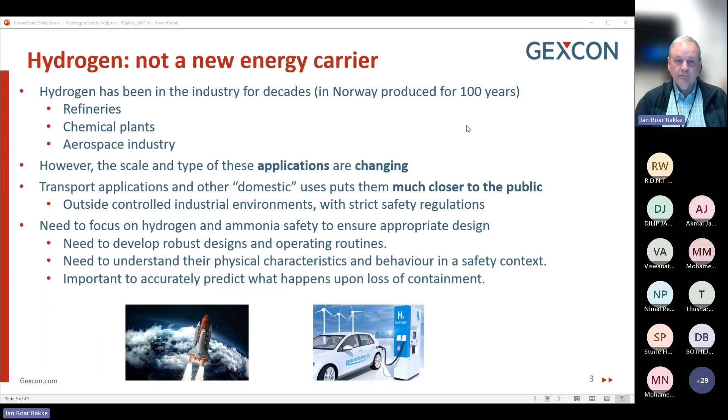Well, is it safe? The reason why we are focusing on hydrogen is, of course, its great potential as a clean and versatile energy source. And producing it, in particular from renewable sources, makes it a very valuable alternative to fossil fuels. But unlocking its potential requires addressing safety concerns associated with not only production and use, but also storage and transportation.

Studying historical incidents will help us identify root causes, develop safer technologies, and implement effective safety measures. And experts can then establish best practices and guidelines to prevent accidents in the future. For example, you can find information about hydrogen incidents on the website h2tools.org under Lessons Learned.

What is very important is to realize that accidents will happen. Risk will never be zero. We are striving to make it as low as we can, but it will never be zero. So when an accident happens, or even just a near accident, investigate and learn from them. That is how we can avoid it happening again in the future.

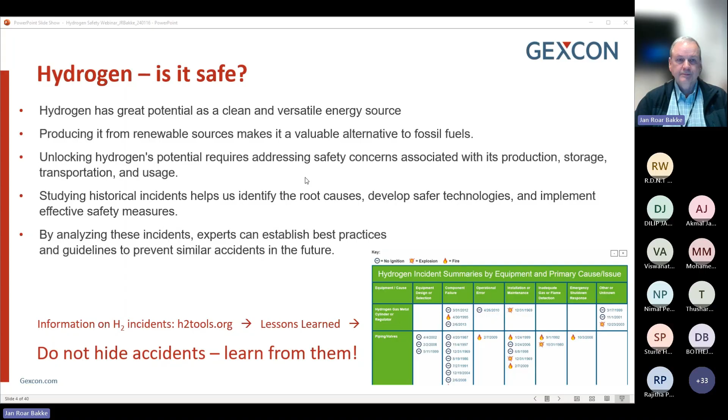As was mentioned, there are 4 parts to this presentation. The first one is examples of hydrogen accidents. The second will be hydrogen safety characteristics, fires and explosions. The third will be analysis and control of risk, and the last one will be on safety regulations. So I will start with the hydrogen accidents.

I don't plan to go into a lot of detail. Time does not permit, and I probably don't have the necessary insight to really go into the depths of all these accidents. But you can find relevant information online, quite detailed, about the different accidents.

The first one that I will address is the explosion that happened at the factory of Laporte Industries in London. It's a long time ago now, back in 1975. There was an alkaline electrolyzer in the plant, which of course produced hydrogen by, in this case, electrolysis of a potassium hydroxide solution. Potassium is what we in Norway would call kalium, but it's the same thing. The process also, of course, produces oxygen, which was then discharged as a waste product.

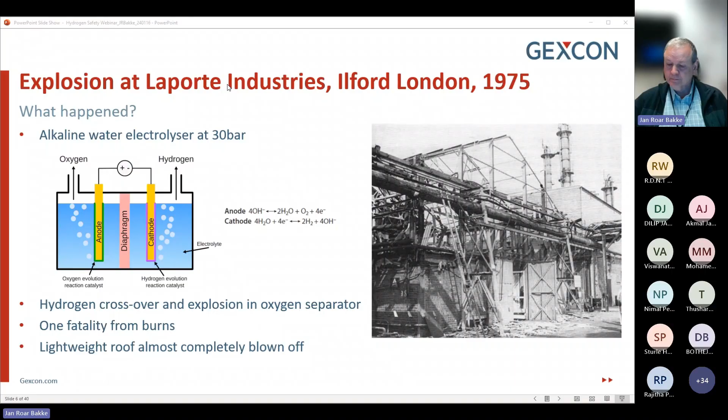So what caused it? Well, first, electrolyte passages were blocked by sludge. These were responsible for admitting electrolyte at the bottom of the cells. This blockage caused a reduction in electrolyte flow. The velocity of the electrolyte increased where the passages were partially blocked, which then caused eventually corrosion and erosion of both the electrode gauzes due to hydrogen embrittlement, and the separator suffered from physical breakdown, resulting in the mixing of hydrogen and oxygen, which ignited and caused this strong explosion.

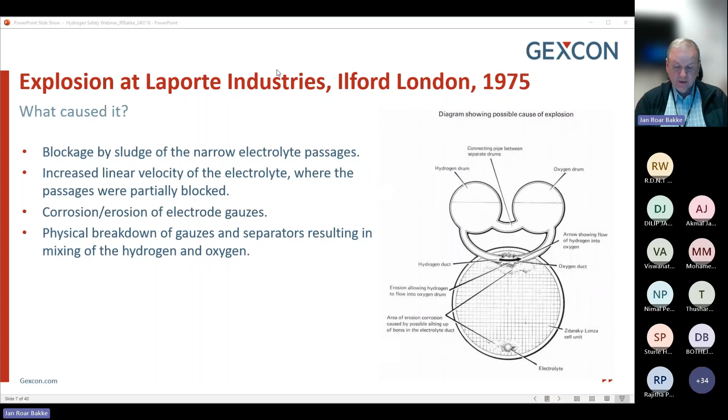The explosion could have been prevented, or wouldn't have occurred, if the manual gas analysis for purity of the oxygen produced had been carried out diligently, if there had been a system for checking the accuracy of the gas analysis recordings, if the dangers from failure to carry out oxygen analysis had been emphasized to the operators, if the plant had been kept shut down until the cause of previous issues had been determined, and if the cause and effects of sludge formation had been more thoroughly investigated.

So this all points to the importance of process safety and hazard awareness, and the importance of operational checks, inspections, and maintenance.

There is an IChemE report that you can find online, which really goes into detail about this accident and the findings.

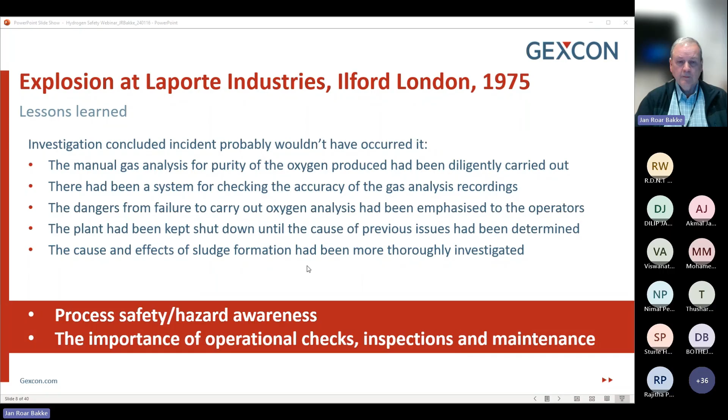Another one: there was an explosion at an ammonia plant in Norway due to a hydrogen leak inside a building. This was back in 1985, still a long time ago. Hydrogen was produced at the ammonia plant by partial oxidation of a heavy hydrocarbon fuel.

The total amount of hydrogen released was estimated to be between 10 and 20 kilograms, which meant then, because 1 kilogram of hydrogen at normal conditions would be about 12 cubic meters, so 100 to 200 cubic meters of hydrogen was released.

The energy content of 1 kilogram of hydrogen is equal to about 30 kilograms of TNT, but not all of this energy released when hydrogen explodes is released in the form of a blast wave. So it was estimated that the explosion was equivalent to between 100 and 200 kilograms of TNT.

So a strong explosion. Two employees died. There were broken windows, structural deformation, and damaged walls, and severe window shattering within a 400 meter radius.

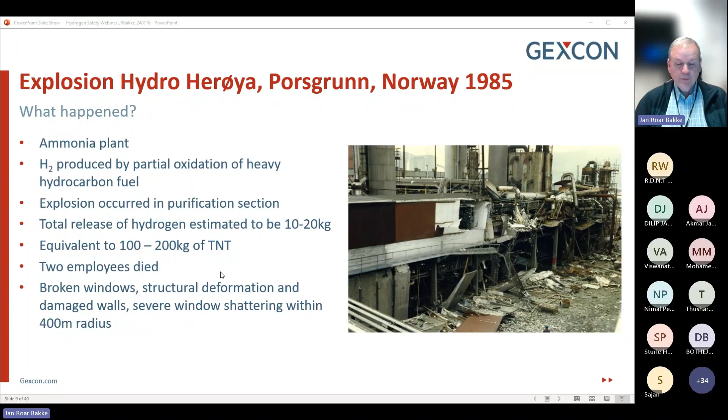So what caused this accident? The main explosion took place in the purification section of the hydrogen plant. This section contained a wash tower where CO2 was being removed from hydrogen by absorption in water.

The accident was triggered by a gasket in a water pump blowing out, which occurred when operators were trying to change from one pump to another. Here I call it from pump B to pump A.

Unfortunately, they did not observe that the valve in pump A was closed. So the water supply from pump A was too low to maintain the water level in the absorption tower, resulting in automatic shutdown.

A second attempt to start pump A resulted in a higher vibration level than normal. The operators discovered that the valve was closed. They tried to open it, but failed due to the large pressure difference that was observed. A backflow of water traveled to the gasket, bringing the hydrogen with it.

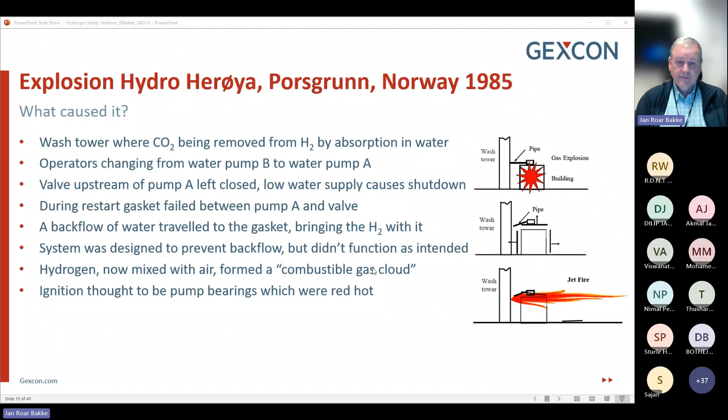So what did we learn? Well, the investigation concluded that the accident occurred as a combination of operational error, technical failures, and weakness in the design to mitigate failure mechanisms. So a key issue here was that the design was actually vulnerable to human error.

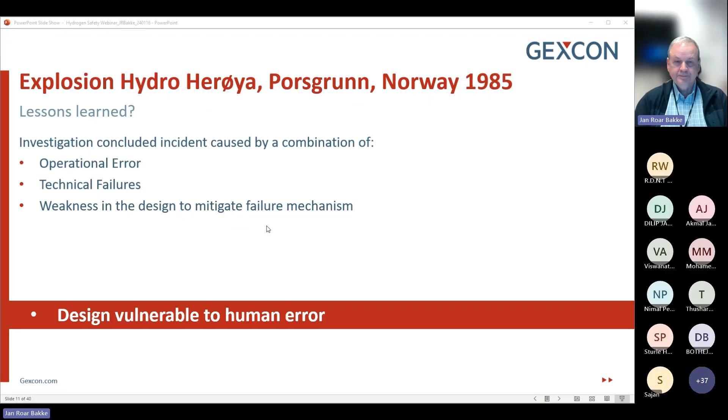The third accident and final one I'm going to talk about here is a hydrogen tank explosion in South Korea 5 years ago. So what happened there? Well, an outdoor tank containing hydrogen gas exploded at the research and development complex during the test of a water electrolyzer, which was coupled to a renewable energy system.

2 men died, 6 were injured, and several buildings were severely damaged up to 100 meters away from the explosion. The equivalent TNT mass in this case was estimated to be about 50 kilograms based on observations of the damage nearby.

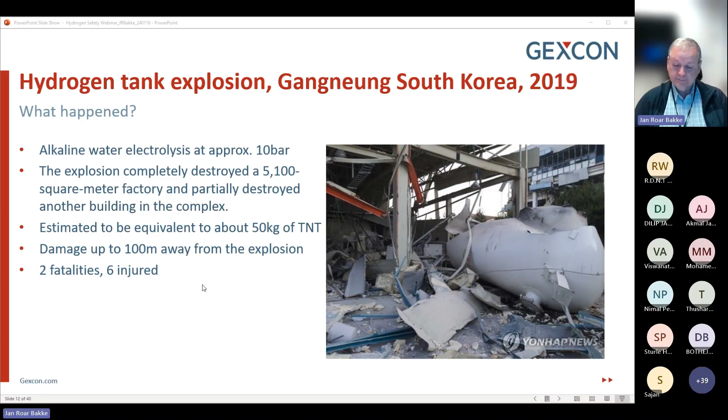So what caused this? A pressurized alkaline water electrolyzer was under test to evaluate intermittent renewable energy duty cycle performance. The electrolyzer's cell membrane suffered from degradation, which permitted excessive oxygen to permeate into the hydrogen storage tank. So the hydrogen then mixed with the oxygen and formed an ignitable mixture.

The mixture ignited within the tank, resulting in an internal explosion. The source of the ignition was unclear, but there is some belief that it could have occurred due to auto-ignition, so by itself, or an external spark. So we don't really know.

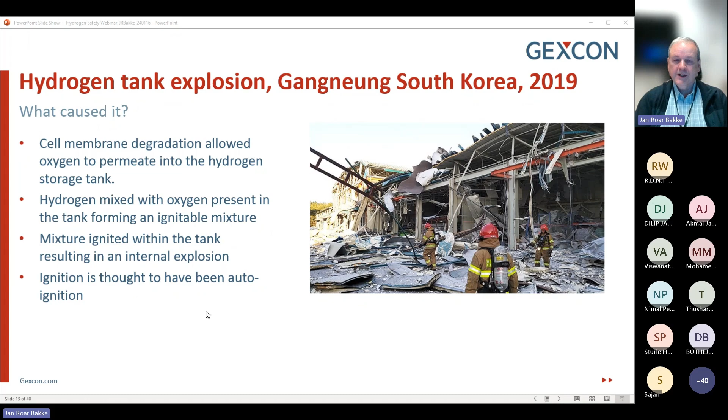The damage that you see on the photo here is quite typical of explosion damage. It is mechanical rupture and deformation of structures. It is different in that sense from fire damage, which could be more like melting, at least when it is steel or metals that are exposed to the heat in the fire.

The investigation concluded that better understanding was required of the connection between membrane gas permeability, degradation, and the dynamic operating range of the project when establishing process safety control. Consideration should be given to automatic actions, such as storage isolation, stopping gas generation when safety limits are exceeded, such as flammable gas mixture, excessive cross-cell differential pressure, and other applicable process safety limits. So the key issue here is to understand potential failure mechanism, know the safe operating limits, and take actions when exceeded.

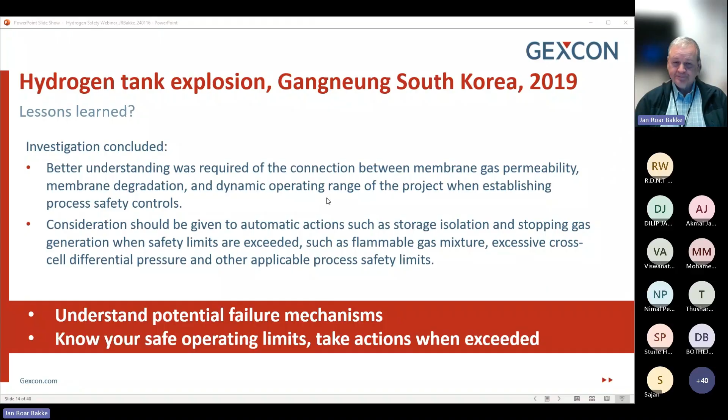All right, that was the first part. Now I go on to hydrogen safety characteristics, fires and explosions. That means to learn more about the physics and chemistry of when things go wrong with hydrogen.

Hydrogen is different from substances like hydrocarbons, for example, and needs to be handled differently. It is extremely buoyant. It is odorless and non-toxic, which means that it's not easy to detect by people. It is a gas at ambient conditions. It can be a liquid if you cool it down below the boiling point, which would be around 20 Kelvin or minus 250 or so degrees Celsius. It has a very wide flammability range, which means that you can ignite it almost at all concentrations.

If you compare with methane, methane is flammable between 5 and 15% by volume, whereas hydrogen is between 4 and 75. Now, you will not get an explosion if you have a hydrogen air gas cloud at 4% by volume or at a concentration of 75% because it will be burning so slowly. But it may ignite and the flame may propagate to other parts of the cloud where perhaps the concentration is nearer to the stoichiometric concentration, which is around 30%, and then give rise to an explosion. But you need a strong ignition source to ignite hydrogen at the flammability limits.

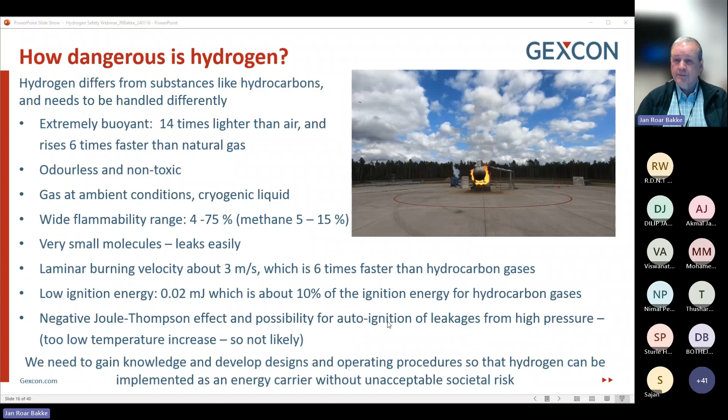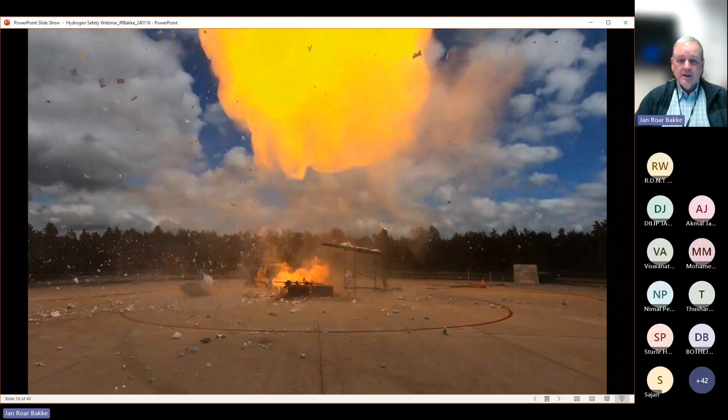But we need to know about the characteristics or the peculiarities of hydrogen to be able to develop designs and operating procedures so that we can implement it as an energy carrier without unacceptable societal risk. Here is just a video which shows a BLEVE, boiling liquid expanding vapor explosion. This was liquid hydrogen in a container which was then heated by a fire from outside.

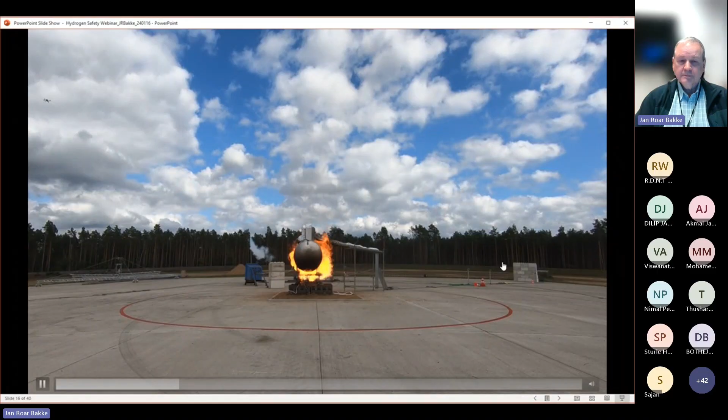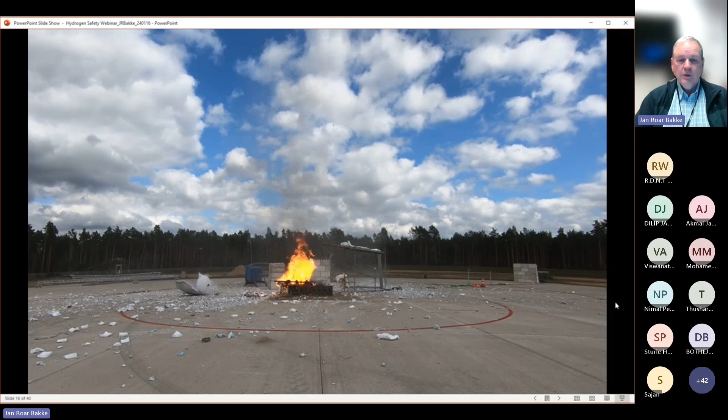So these BLEVEs is something that can happen with other fuels, and it also can happen with hydrogen.

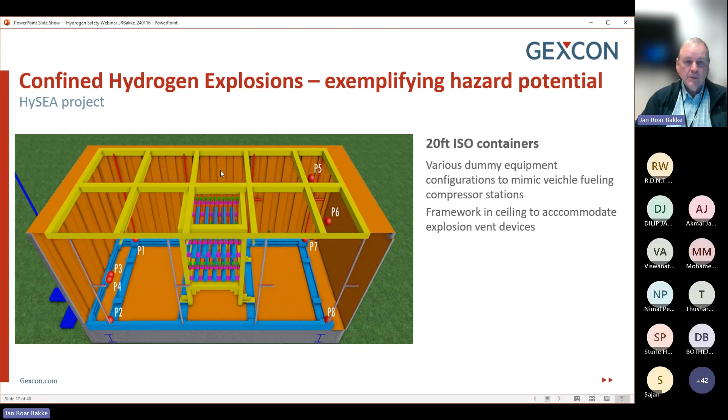I would like to make note of the ceiling in these containers, where we removed the ceiling and put in some framework to be able to accommodate explosion vent devices, meaning weak plates which would open up very early in an explosion due to the low pressure experienced at the beginning, so that the overpressure would be vented out of the enclosure and thus relieving and reducing the maximum overpressure that could be experienced.

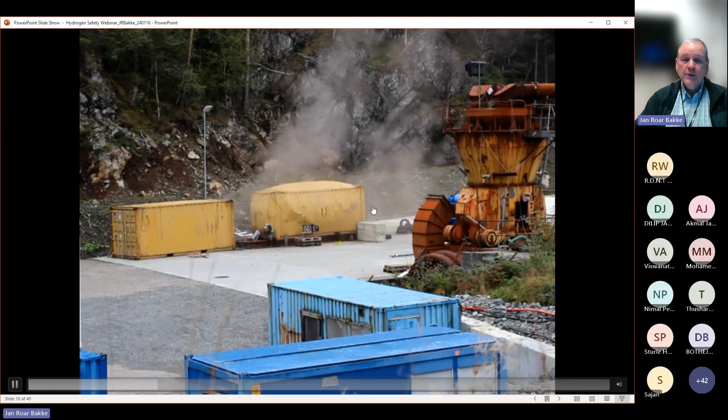Here's a video showing such a test. 24% by volume, so lean, but relatively close to stoichiometric concentration. And you saw a door from the end of this container flying through the air, and you can also see the shape of the container is now different.

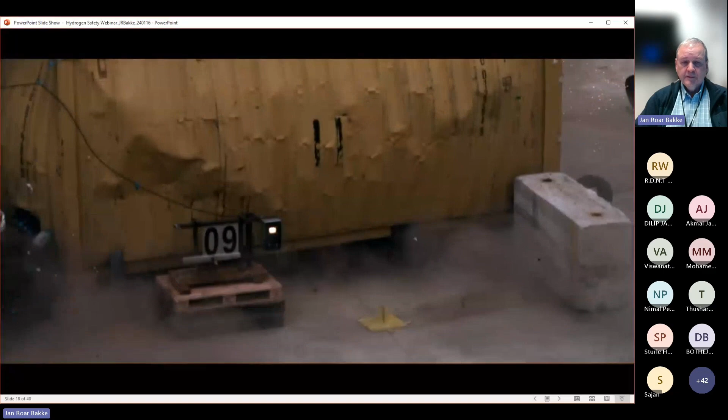Here is a high-speed video of the same. So this explosion was approximately 1 bar or 1.1 bar overpressure, compared to atmospheric pressure. From another angle.

So this is an illustration of what can happen if you confine hydrogen. Remember, I mentioned that hydrogen is light, so it would tend to move upwards. But if you actually contain it in a container like this, then it will not be able to disappear or spread out and go away from where the explosion happens.

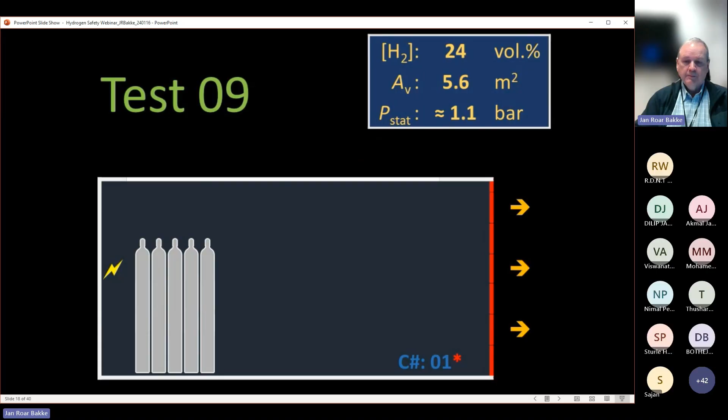So one of the learnings, one of the things that one should think about when it comes to hydrogen safety, is that you should not collect it inside something. Try to have open structures so that it can disperse because of its buoyancy. It will do that.

Here I have two videos also showing an identical setup, now with these explosion vent panels on the top, on the ceiling, as you can see from the pictures here. The left video is 12% by volume, and the right video is 15% by volume, so slightly higher concentration on the right-hand side, but still lean, far away from stoichiometric.

You will see that the left one with the lower concentration is slower and weaker, and the right one is faster and stronger. You can judge that based on the speed of the opening of the panels. So this is slow, and this is faster. It's quite clear.

So a relatively small difference in concentration will give rise to a stronger explosion.

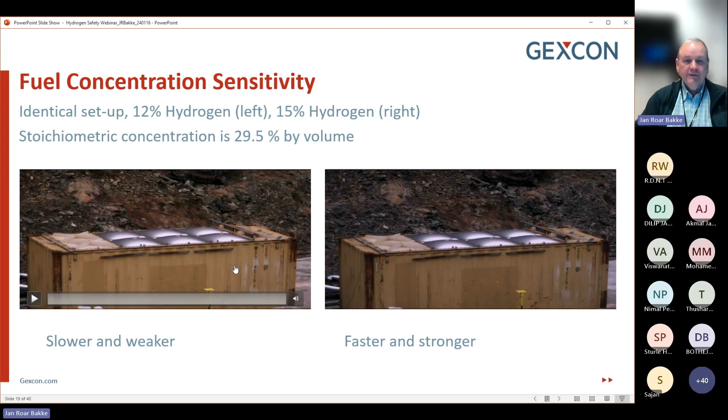We don't know everything that we should know or need to know. But the research is ongoing at many places, in Gexcon and other places as well. There is a lot of research going on to try to understand hydrogen better so that we can use it safely.

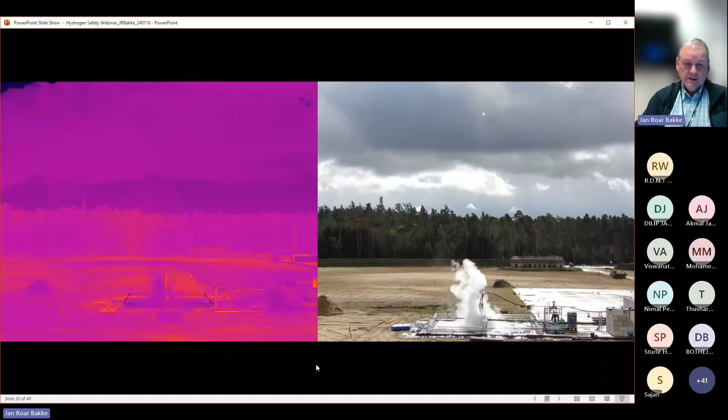So the question that immediately came up was, why did it ignite? Because we didn't have an ignition source. There was nothing there that could explain that it ignited.

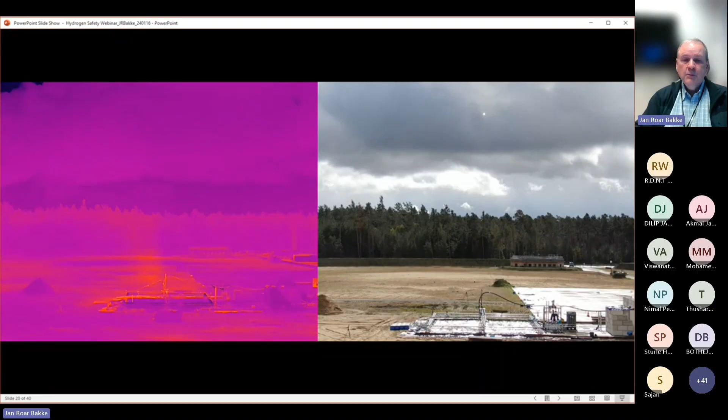But this test was repeated more than 30 times, and in more than 70% of these tests, ignition happened without any known ignition source. And it is clear, if you want to do safety assessments and use hydrogen in a safe way, these are things that we need to understand. Why does it ignite?

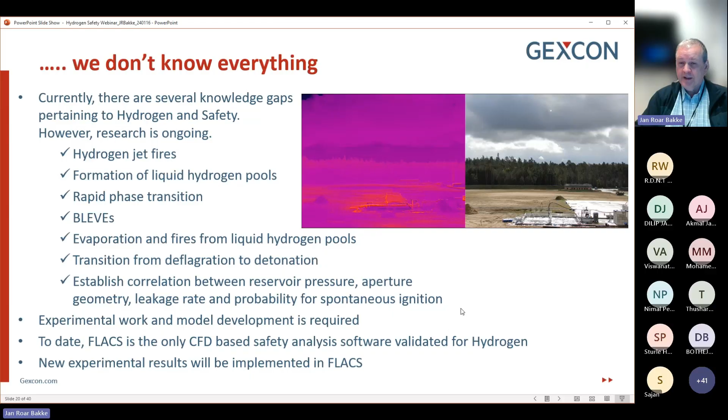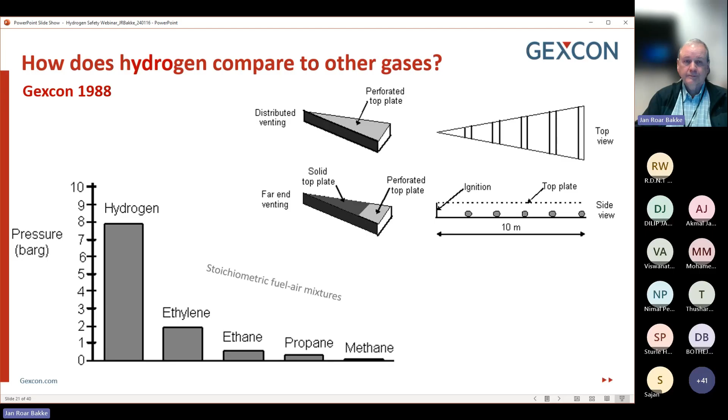I have a few videos, not from hydrogen explosions, but they illustrate which parameters influence explosion strength. These will be the same parameters, whether you have methane or propane or hydrogen for that matter. The main difference with hydrogen and the others is that it is more reactive, it ignites more easily, and it burns faster.

So I will now show a video of 3 explosions, and there is a permeable panel on the end of this module, which will blow off if the explosion is strong enough. The 3 explosions: 0.3 bar overpressure is the first one, the second is half a bar, and the third one is 1 bar. From lean methane air to stoichiometric methane air to stoichiometric propane air. Propane is worse than methane in terms of overpressure.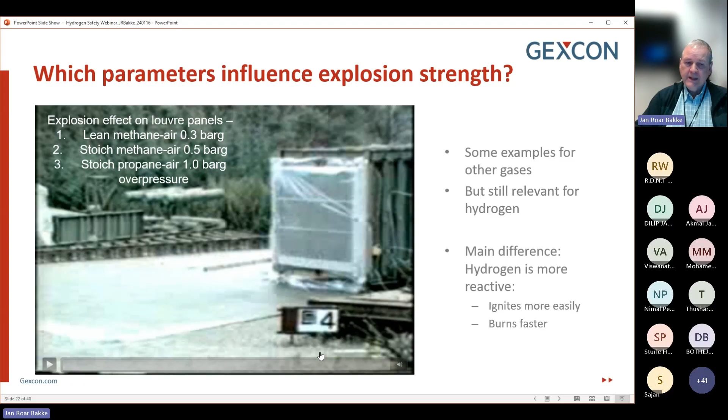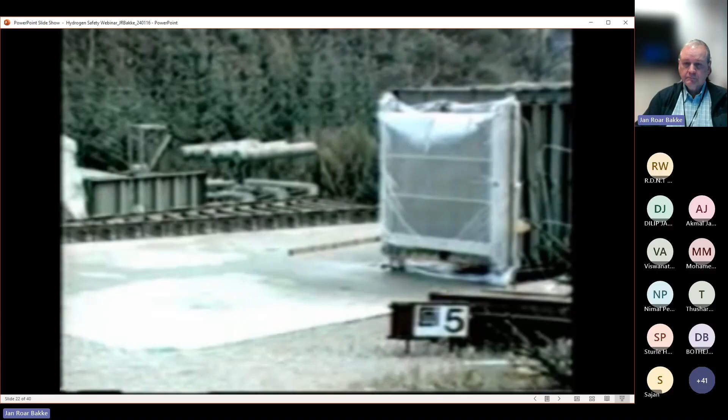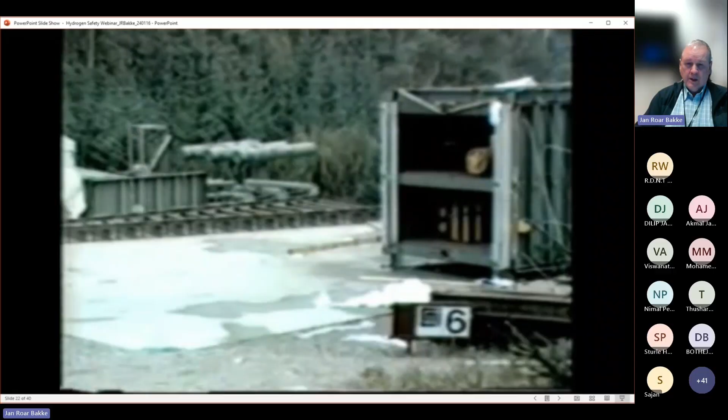0.3 bar, nothing much happened. You can design for 0.3 bar. Half a bar, stronger, as you can see, and the panel fell off. And 1 bar — now 1 bar is a relatively strong explosion, and it can be quite expensive to design for a 1 bar explosion overpressure. Here you see the panel ended up in the forest around 40 meters away from the test facility.

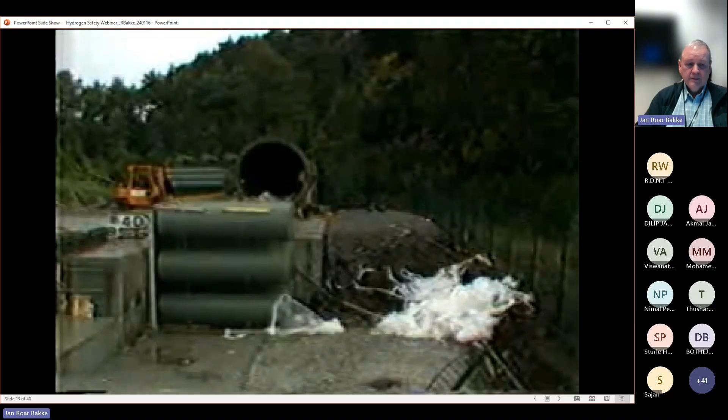When you consider designing a facility involving flammable gases, and also hydrogen, remember this: that the congestion you put in there in terms of pipework and so on will influence how strong an explosion can become.

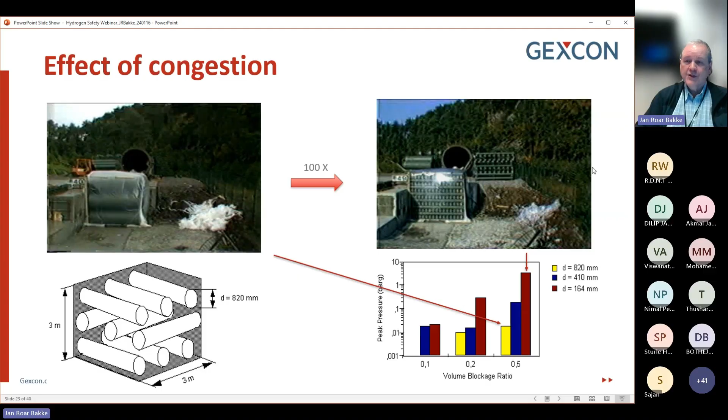Another couple of tests, these were done by DNV-GL. We had a 45-meter long rig containing pipework, and there is plastic around the rig to contain the gas, because we fill the rig with gas and then we ignite it. The first one is obstacles along the whole rig, and you can see the flame starting to burn on the left-hand side, and then it accelerates and goes faster and faster. It is so that the faster the flame is, the higher the overpressure is.

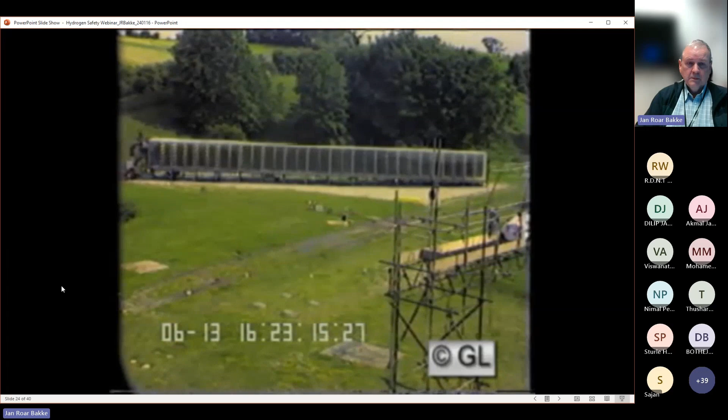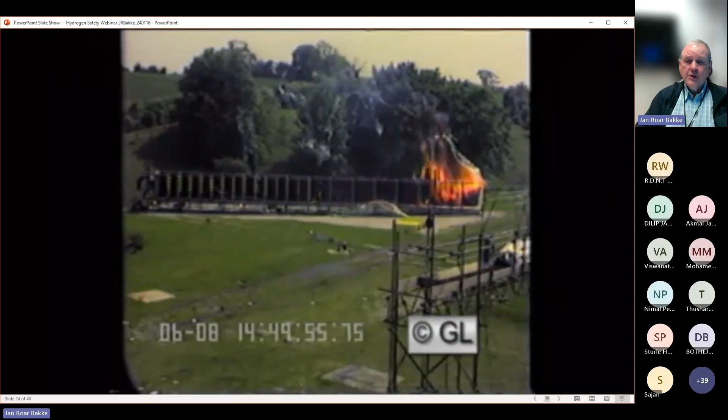You could clearly see the acceleration of the flame to quite high velocities. Then let us look at the second one, where the second half of the rig is filled with gas, but no obstacles, no pipework. You see that the flame slows down and burns really slow, just maybe 5-10 meters per second or so, which would not give rise to any overpressure development.

So obstructions, as I said for the previous slide also, influence explosions also with hydrogen.

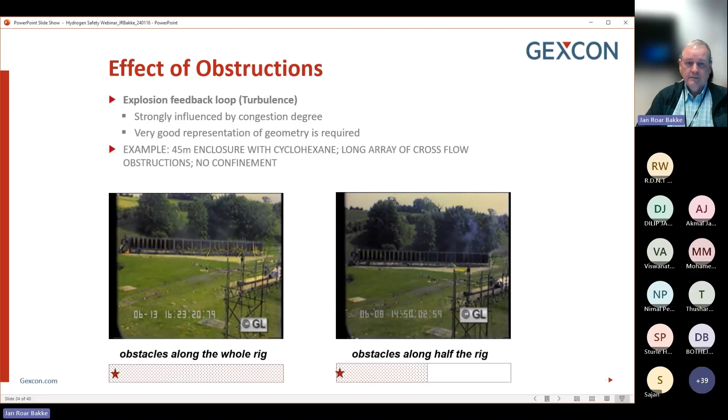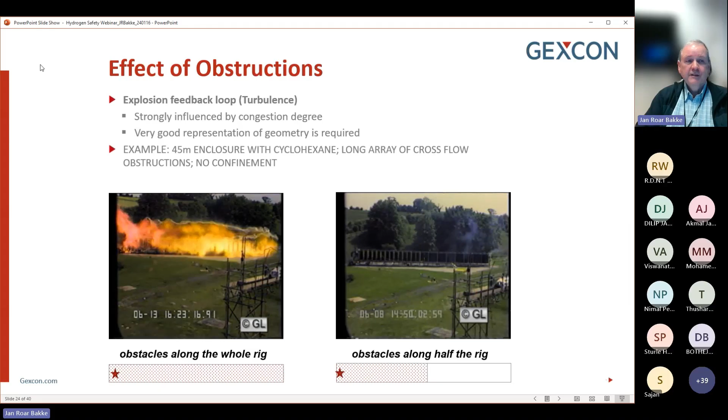Then we have two different types of explosions that we normally consider: deflagrations and detonations. I will not go into detail about what they are, but these ones were deflagrations. They can have flame velocities from tens of meters per second to a few hundred meters per second, and you can have overpressures in the range of millibar up to a few bar.

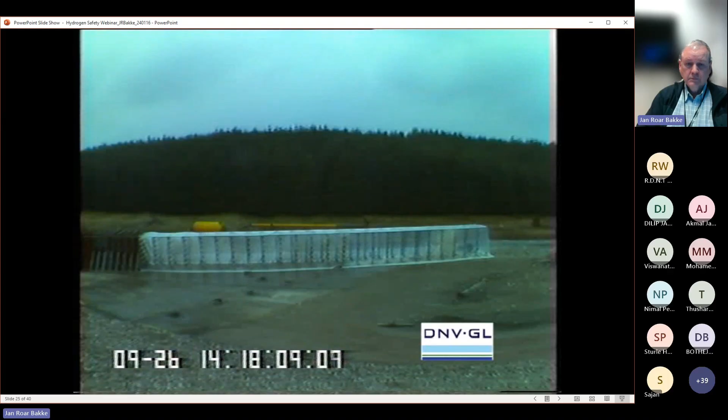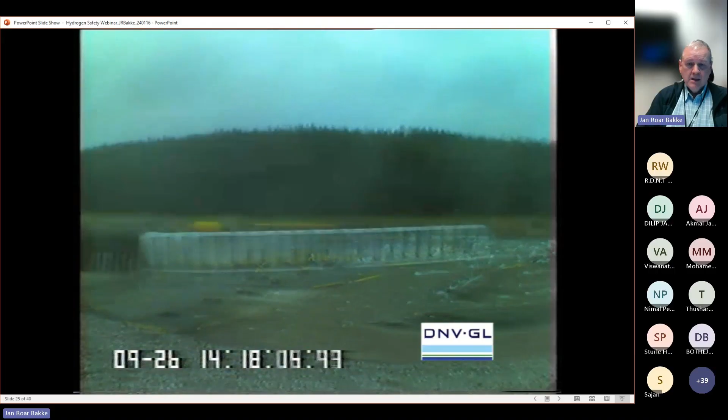This was the detonation, much faster and much stronger than a deflagration. All right, so that was a little about characteristics related to fires and explosions and what to consider. Now I will pass on to analysis and control of risk.

As you have seen now, hydrogen does carry inherent risks, such as flammability and explosiveness. We still believe, however, that with appropriate safety precautions, these risks can be managed effectively, but we need to understand what makes the hydrogen tick. What is the difference between hydrogen and other gases? And that is very important.

Hydrogen safety technologies have improved, such as leak detection systems, hydrogen sensors, improved storage and transportation methods. But we still need to consider safety elements like comprehensive risk assessments, safety planning and design, rigorous training and education for personnel, regular maintenance and inspection, emergency response protocols, robust incident reporting and investigation procedures. By integrating these safety elements into hydrogen projects, the likelihood of accidents and consequences can be minimized.

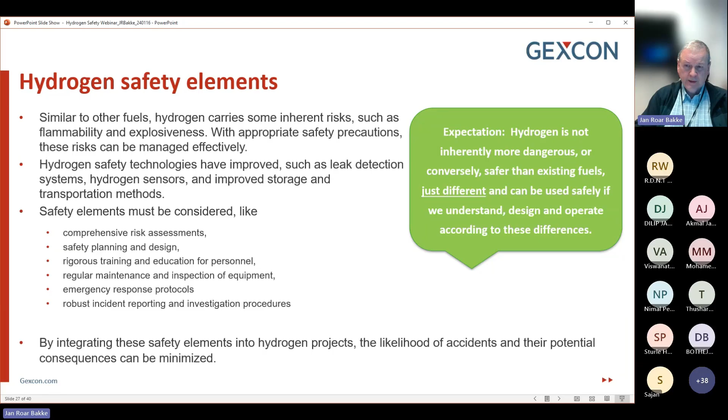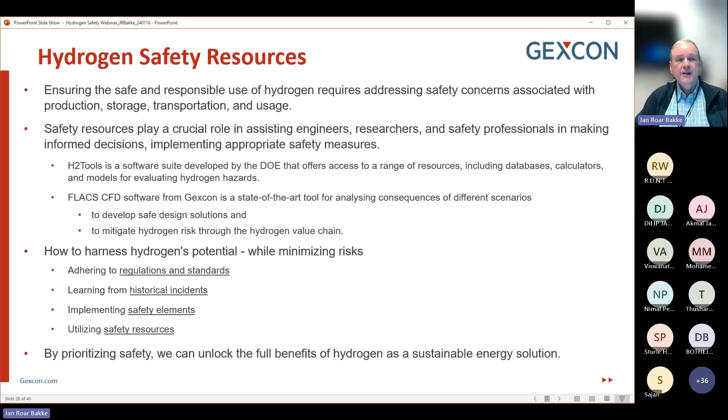When we do or want to do hazard and risk assessment for hydrogen, it's not really that different. The methodology is the same as we have used elsewhere in the oil and gas industry, for example. It is just that we have to understand the hydrogen physical and chemical characteristics that makes hydrogen different from, for example, methane.

Then HAZOPs, hazard and operability studies, and or FMEA, analysis on impact of process deviations and failures on hazards, functionality, and operability. Then you have LOPA and SIL assessments, identification of critical scenarios and assessment of independent safety functions.

And finally, QRA, which is the most complex way, quantitative risk assessments, which involve calculation of risk and comparison with relevant quantitative acceptance criteria. When you do QRA, you can also compare risk-reducing measures, and based on the calculated risk, you can choose the risk-reducing measures that are the best for your case.

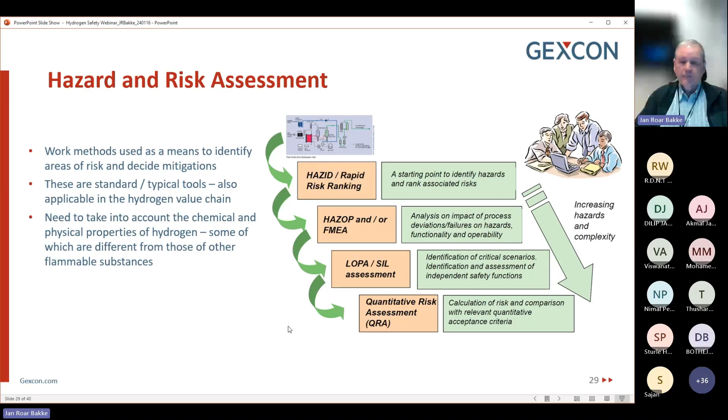Process safety assessments are, of course, done in early project phases, like concept selection and pre-feasibility, as in the design development project phases, which is feasibility, front-end engineering design, and detail design, and in the operations project phases. We have commissioning, startup, normal operations, turnarounds, and decommissioning. I will not go into detail about what these involve, but you can have a look at it when you receive the presentation at a later stage.

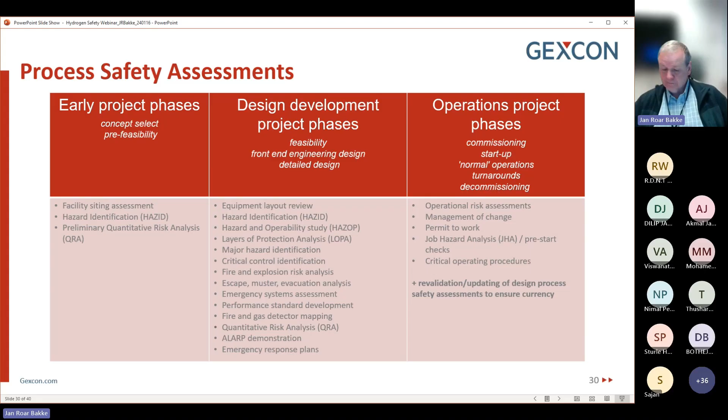The third or the most complex analysis method I mentioned to analyze risk was QRA. Typically in QRA, you tend to use computational fluid dynamics, so three-dimensional CFD simulations. And one important aspect of that is that you can, as I mentioned, actually analyze the effect of risk-reducing measures.

For example, in this case, you see an experiment where we have these explosion vent panels on top of the module. That is the experiment. And below, you see the simulation, which shows you how the software, the 3D software, would analyze the scenario. And here we can, for example, test and model the effect of having different weights of panels.

We can have different numbers of panels, sizes of panels, locations of panels, and so on. All of this can be analyzed by simulating using 3D CFD. It is, of course, much cheaper than doing the experiments. So that is why it is done. We can't always do experiments every time we want to design safety features. So let us look at the video.

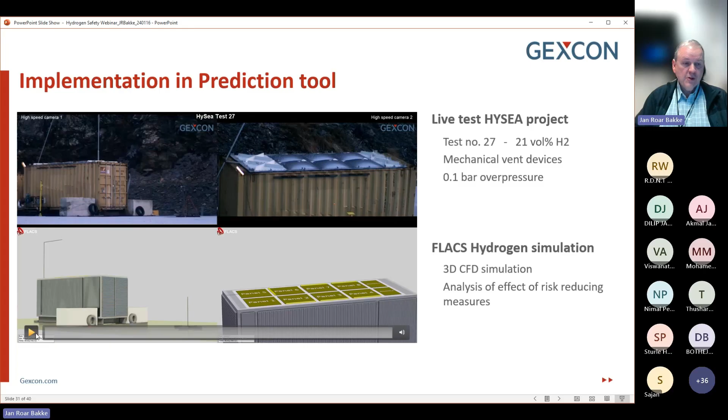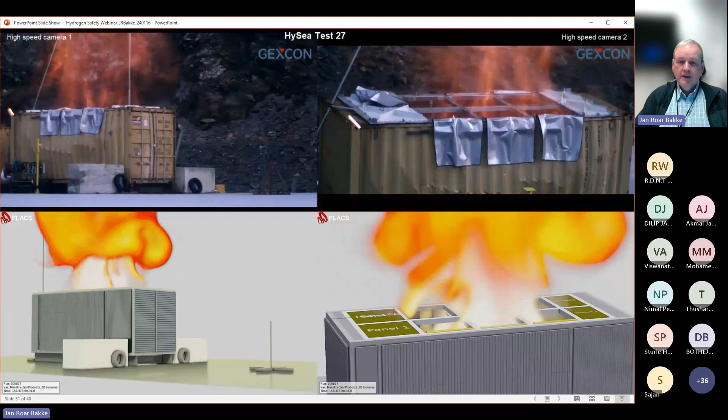Now, of course, this is just an illustration showing the experiment and showing the same output from the simulation. But in addition to this nice graphic, in the simulation you will get the pressure development inside, you will get the flow velocities of gas out, and so on.

So you can see if instead of 6 panels we have 4 panels, you would probably see that the pressures would go up inside the simulation module. If those pressures are acceptable, it means that it is maybe enough with 4. If the pressures are too high, you may have to use 6. This is the kind of evaluations you can do using CFD.

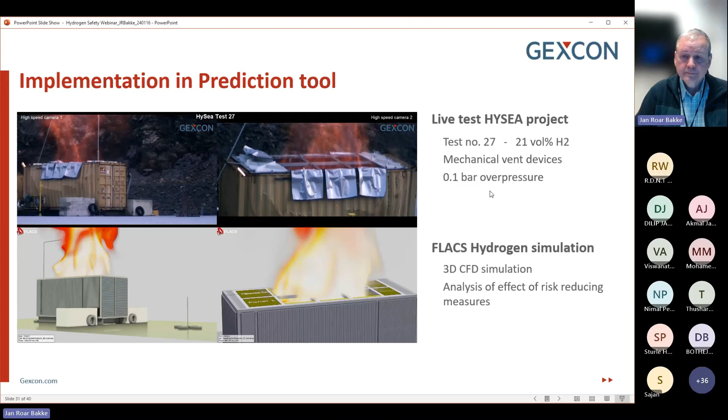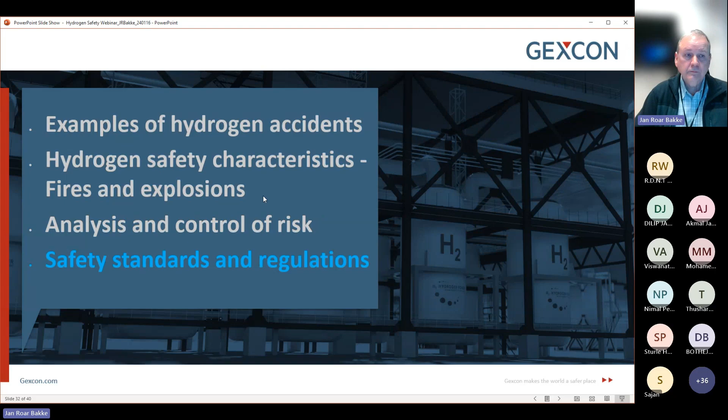So then the final part is about safety standards and regulations. Regulatory bodies worldwide have been developing guidelines and standards specific to hydrogen technologies, covering production, storage, transportation, and use. And adhering to these standards helps create a consistent and safe operating environment.

Now, this is not done work. This is under development. So guidelines are being developed, to some extent have been developed, but more work is required, amongst others, to understand the physical and chemical behavior of the hydrogen.

In the US, codes and standards for hydrogen facilities are developed and maintained by, for example, the NFPA and the Department of Energy. The NFPA has published the NFPA 2 Hydrogen Technologies Code, addressing the design, installation, operation, and maintenance of hydrogen systems. And the DOE develops safety guidelines and supports research and development to advance hydrogen safety.

There is also something called the Hydrogen Safety Panel, which brings together industry stakeholders, safety experts, and researchers to provide guidance and support for hydrogen safety, focusing on safety challenges, sharing best practices, and promoting safety awareness.

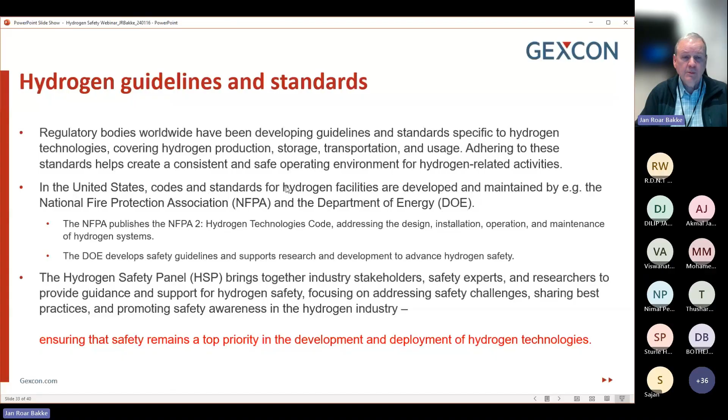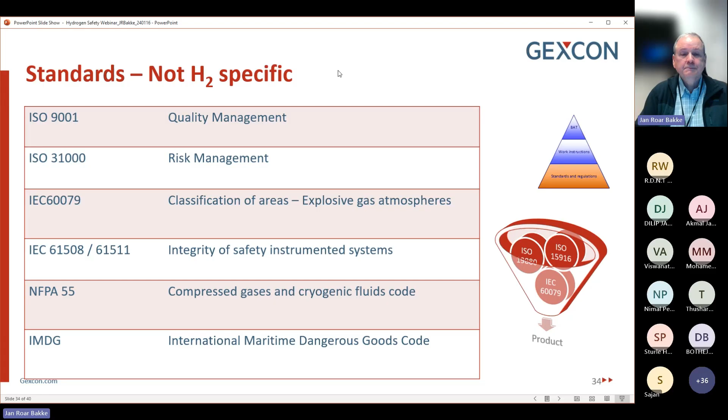There are a number of standards that are relevant, even though they are not hydrogen specific, like quality management, risk management, area classification, integrity of safety instrumented systems, and so on. As I said, they are not hydrogen specific, but still relevant.

I should perhaps mention that GEXCON and Greenstat, who is the organizer of this webinar, we are working together with the Norwegian regulatory authorities in a project where we are cooperating with Indian authorities to develop hydrogen safety regulations. So that is ongoing work at the moment between Norway and India.

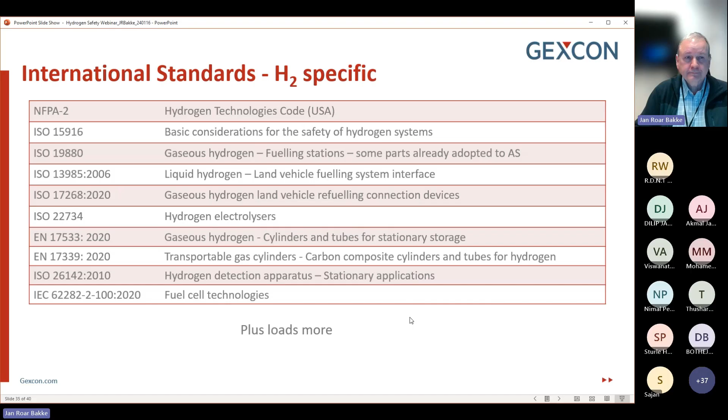It is, at least in our part of the world, that accidents involving hydrogen may have a severe negative effect on the social license, and lead to negative public sentiments about hydrogen if large accidents occur. So it is important to ensure that the accidents are as few as possible and that they are not severe.

So companies involved with the hydrogen value chain should pursue and promote safety improvements beyond standards and regulations. They should promote cross-industry learning, so sharing is extremely important, and ensure that all stakeholders are aligned to the safety objectives.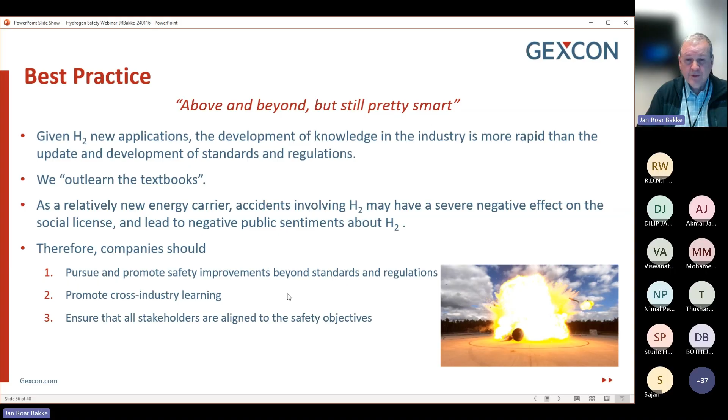I had one more slide here, which I was looking for. In 2019, the European Hydrogen Safety Panel published a guidance document for safety planning for hydrogen and fuel cell projects, in which the safety panel experts extracted 10 safety principles from the actions required to prevent an escalation of a prototypical hydrogen accident.

The derived safety principles, as listed in this table, state simple objectives, being widely understandable and acting as preventive barriers, or at least as risk-reducing measures on various elements of the chains of event.

I'll read quickly through them: limit hydrogen inventories, avoid or limit formation of flammable mixtures, carry out ATEX zoning or hazardous area classification analysis, combine hydrogen leak or fire detection and countermeasures, avoid ignition sources, avoid congestion. Remember the effects of congestion on explosions. Avoid confinement. We don't want to collect the hydrogen, we want it to go away. Provide efficient passive barriers in case of active barrier deactivation.

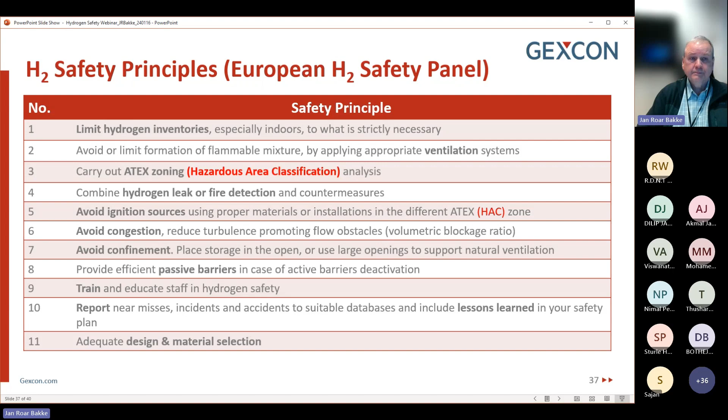For a number of years, I was involved with the IOGP as chairman of the Process Safety Subcommittee. That's why I mention it here. It is not hydrogen specific or even hydrogen related, but it is very good advice when it comes to operating management system frameworks, barrier definitions, key performance indicators, and so on - how to manage risks in an environment which handles, for example, flammable substances.

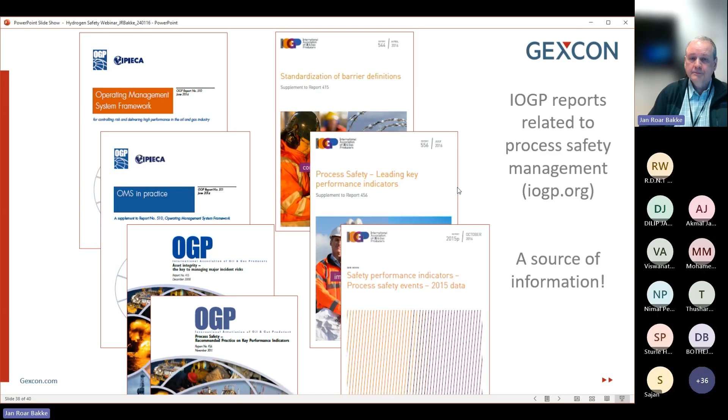So I would advise you to go to iogp.org and look up this information. Some of these relevant reports that I think are good reads are shown on this slide. So, to conclude...

What is the way forward for hydrogen and safety? There are some points that I want to share here. I think they are very important. You should integrate contributions from important stakeholders like regulatory bodies, research and teaching institutions, funding industry, and other relevant knowledge partners.

Fundamental knowledge is still required and needs to be developed. Remember the ignition from no ignition source. Knowledge that you develop should be codified into software so that you can actually do, for example, consequence analysis, looking at the effects of risk-reducing measures. You should develop and verify safety best practices.

You should have a focus on teaching. Universities should teach students, and the workforce should be developed, which is competent with regard to hydrogen safety. I have heard numbers saying that in India you need maybe 100,000, or I don't know, a large number of safety engineers to manage what will be required in this hydrogen economy that is coming up.

You should contribute to development of laws and regulations. Regulatory bodies are and will be required to audit, investigate, and ensure compliance to laws and regulations.

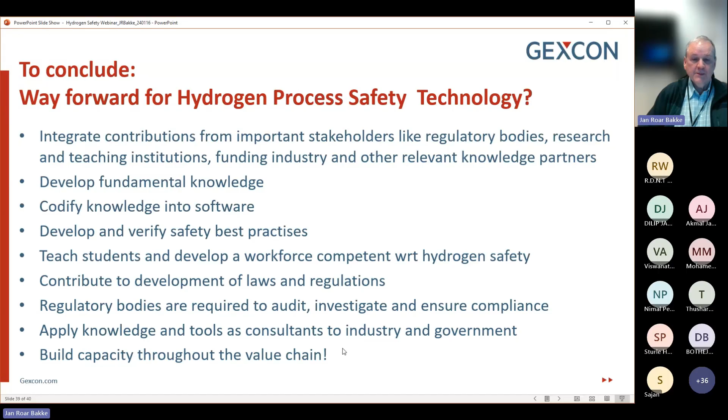As consultants, we should apply knowledge and tools to industry and to government. And in general, throughout the value chain, we should build capacity to manage. We shouldn't have 5 people sitting there controlling applications from industry and handling hundreds per day. It's not feasible. The work is not done well.

All right, that is the end of my presentation, 1 hour. Thank you very much for your attendance.

Thank you very much, Jan Roar. It was an excellent presentation. I would like to say a few words about your presentation, which I think was quite engaging, but also a testament to your profound expertise and experience in this field. The way you went through it systematically, the subject of today, safety.

I think that we have learned from past accidents in the hydrogen sector, which provide us with invaluable insights. And I think that through these lessons we can also shape a safer and more secure future for our endeavors in the hydrogen technology and projects that we are going to implement going forward.

Hydrogen, we know with its incredible potential as a clean energy carrier, comes with its own sets of challenges, as we all know. And I think you, Jan Roar, masterfully explained to us the complexities and degrees of hydrogen safety, offering us a comprehensive understanding of the measures necessary to mitigate risk effectively as well.